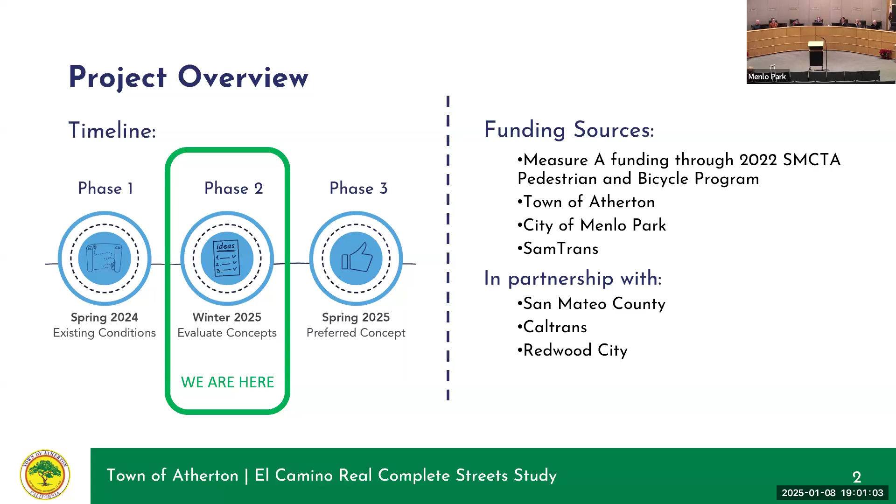Focusing on the work in this current phase, we've taken what we've learned from the existing conditions analysis and developed preliminary design options. These options are being evaluated based on criteria tied to our complete streets goals and objectives, and framed based on the trade-offs required to implement each option. During this phase, we'll go through another round of robust engagement with partners, key stakeholders, and the community to get feedback on these concepts. This will include in-person and virtual events, an online survey, and community meetings that we hope you can help promote attendance for. This feedback will inform the next phase of identifying a preferred concept, which will ultimately need to be coordinated with Caltrans for more detailed design and engineering work.

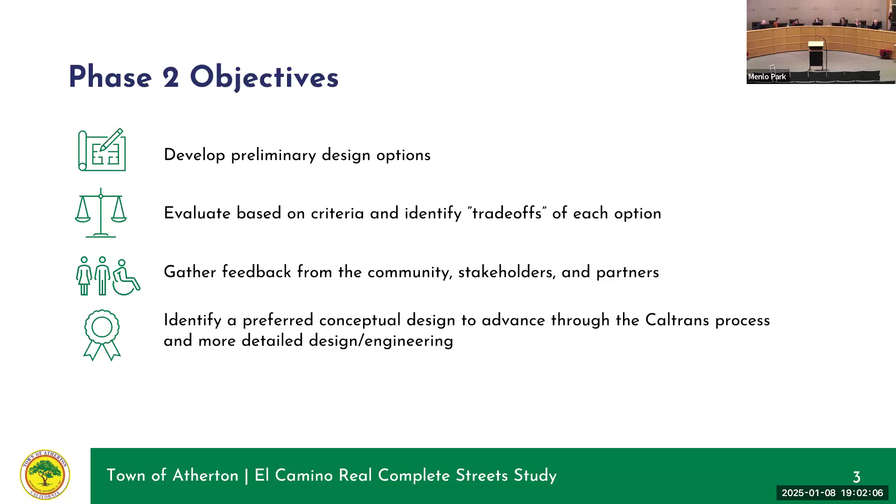So with that, I'll hand it off to Doug.

Thanks, Carol. All right. You know, like any local transportation initiative that is undertaken, this project didn't come out of thin air.

It was in fact rooted in a number of local policies and plans in the town of Atherton. But because we really do see this as a multi-jurisdictional corridor with frontage in Menlo Park, we also looked to other sources, including sources within Menlo Park.

The primary policy foundation for this project came from our 2014 citywide Bike and Pedestrian Master Plan. That plan looked at El Camino Real as the backbone of an active transportation network throughout the town, and called for conversion of the outer southbound lane on El Camino to a Class 1 facility. It also looked at other facilities on side streets, including Class 2 lanes on Selby Lane. That master plan called for a traffic study to look at the feasibility of converting one or both travel lanes in each direction for these dedicated pedestrian and bike facilities, which we'll go over a bit today.

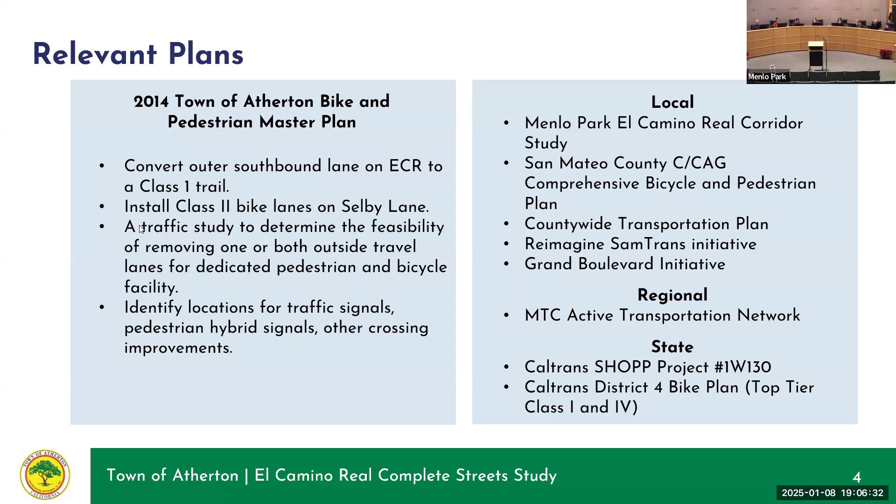Let's go to the next slide. So like any good plan, we took stock in the year 2024 to catalog the existing conditions along the corridor.

We did a lot of work to identify who uses the corridor, and what we found is that, as a multimodal corridor, there's a whole population of different demographics being served. We have a number of schools, particularly in Atherton, along El Camino, and a number of school-aged kids that use the corridor.

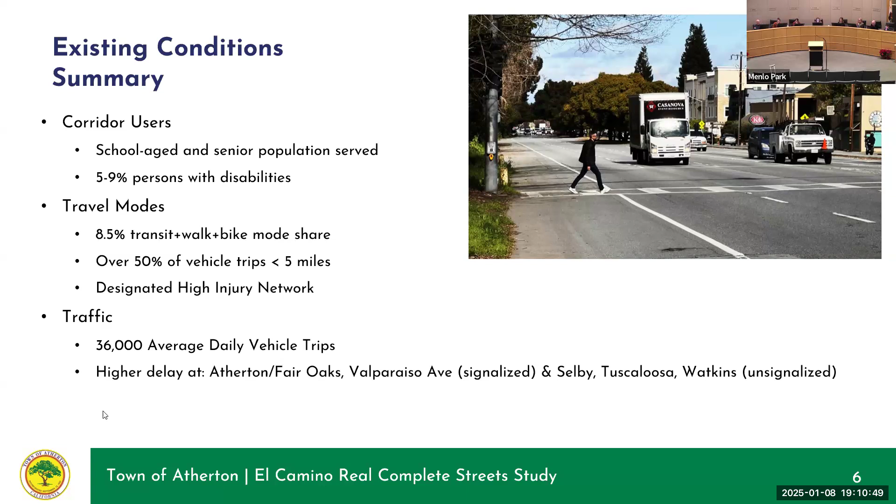In terms of traffic numbers, pretty much what you'd expect from your neighbors to the north. We had 36,000 ADT throughout most of the corridor. We had higher delay at the signalized intersections in Atherton, primarily at the Atherton-Fair Oaks intersection. We know about Valparaiso as well. Selby Lane, which does not have any stop controls on the main line of El Camino, has some delay. Tuscaloosa and Watkins are other unsignalized intersections where we had some amounts of delay, particularly at cross streets.

In terms of what the community had to tell us, we looked at all the data sources that produced some of those findings we showed earlier, but we also went to the public, both Atherton residents as well as many Menlo Park, Palo Alto, and Redwood City residents, to ask them what their top priorities are for this corridor so we can go from good to great.

Not surprisingly, safety for both pedestrians and cyclists were priorities number 1 and 2 by a long shot from the over 300 surveys we received. Safety for drivers was also a concern. Many of us who drive down there see people trying to navigate the shoulders by bike or foot and want to see safety improved for those folks as well.

Then you see a number of other priorities that are on a different tier than the safety-related items we mentioned earlier.

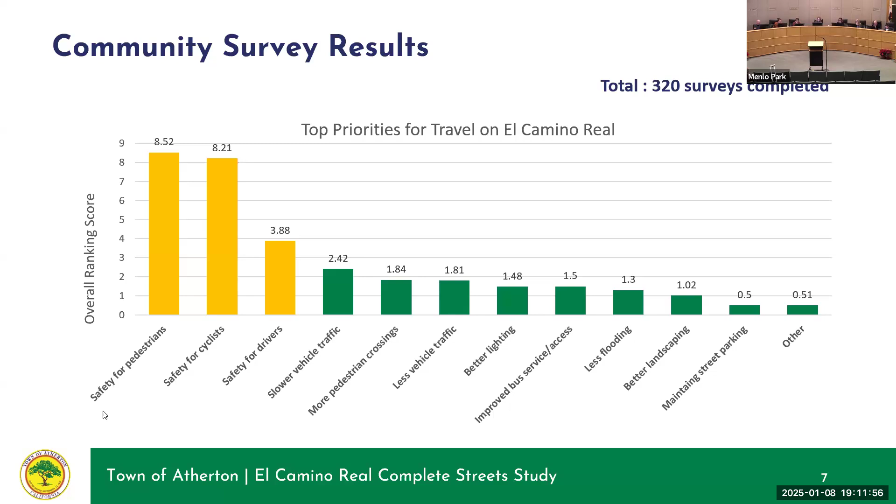All right, so that's a real quick snapshot about the existing conditions that set the stage for some of the design concepts we've been looking at. I'm going to turn it over to Andrew Lee from Parametrix, who will walk you through some of our concepts and get some initial feedback from you.

Great, thank you, Doug, and good evening, commissioners. We'll just go to the next slide.

So just to recap a little bit of what Doug mentioned, the initial concepts that the project team developed were based on community input and also some of the parameters of the study. We considered many alternatives, not all of which are being presented tonight. Some of the initial alternatives were screened out, including elements like two-way bikeways on one side of the street or busways. But the 3 we will be presenting tonight are the ones that scored most highly in our initial screening in relation to those concepts and the community input we received.

So tonight's objective is to receive your feedback on the design alternatives and ultimately to advance a preferred design into a later stage for detailed engineering. Next slide, please.

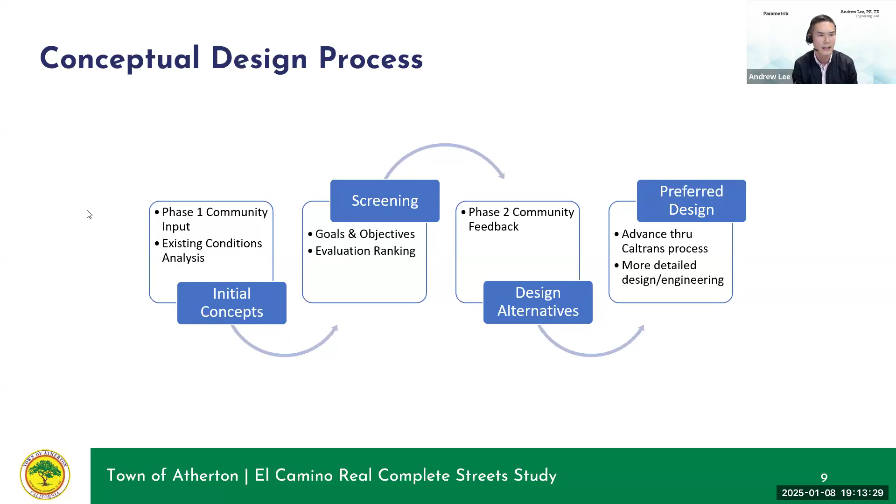We tried to synthesize the competing needs of the corridor into 6 broad categories, which were alluded to in the community feedback process. They relate to safety for users bicycling, walking, driving, and riding transit. And then outside of the immediate safety issues, some quality of life matters as they relate to traffic diversion, especially when looking at alternatives that may reduce the number of vehicle drive lanes.

Some of the concepts would also require reallocating existing street parking along the corridor, primarily in the northbound direction. And then lastly, there's the opportunity to install stormwater detention and collection features, as right now it's mostly unpaved shoulder and not equipped for stormwater runoff. Next slide, please.

So in the section specifically adjacent to Menlo Park, largely from Glenwood and Valparaiso to approximately Alejandro, we're dealing with an approximate 100-foot right-of-way. It does get a little bit wider to the north as we get into the North Fair Oaks area, widening out to about 130 feet. But specific to the Menlo Park area, this is where El Camino Real has 3 southbound lanes and then 2 northbound lanes with on-street parking.

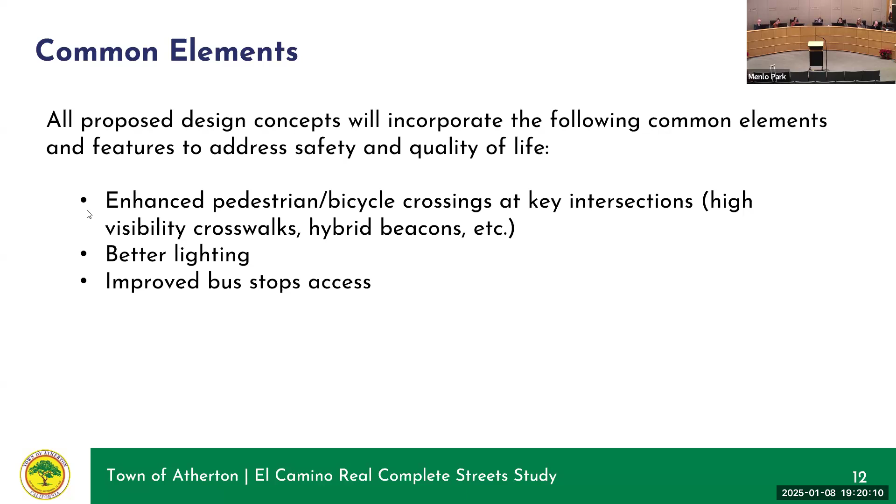So the three concepts we're presenting tonight are essentially a spectrum, one from probably the least amount of change to a greater degree of change, and then a hybrid of the two.

For design concept one, the main feature is that it would maintain 3 lanes in each direction of El Camino Real where there exist 3 lanes. The caveat is that in the Menlo Park adjacent area, where there exist only 2 northbound lanes and parking, that condition would remain. The intent is that the sidewalks and bike lane would fit within the existing unpaved area and painted shoulder, so the bike lanes would be a simple stripe with no horizontal or vertical buffers.

In some areas, the sidewalks, particularly in the southbound direction, would be rather narrow and possibly constrained by existing raised features like utility poles and large trees. So the enhancement to both bicycle and pedestrian comfort and safety would be more on the modest to marginal side of the spectrum.

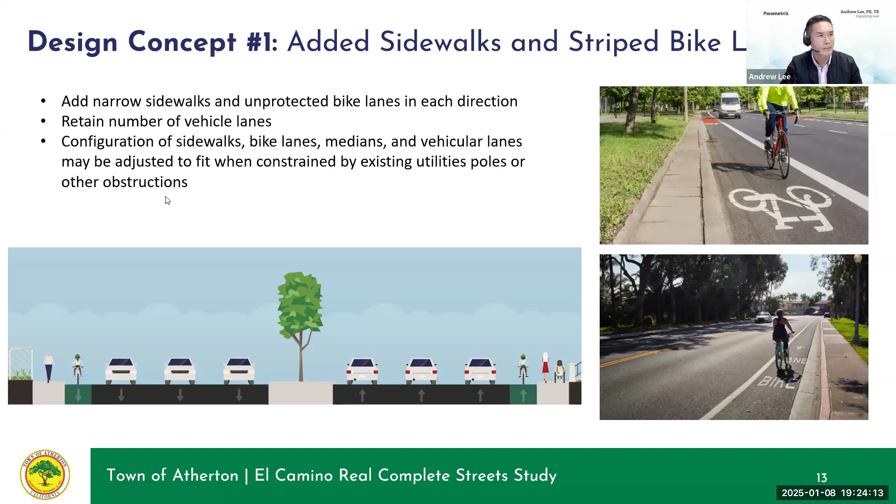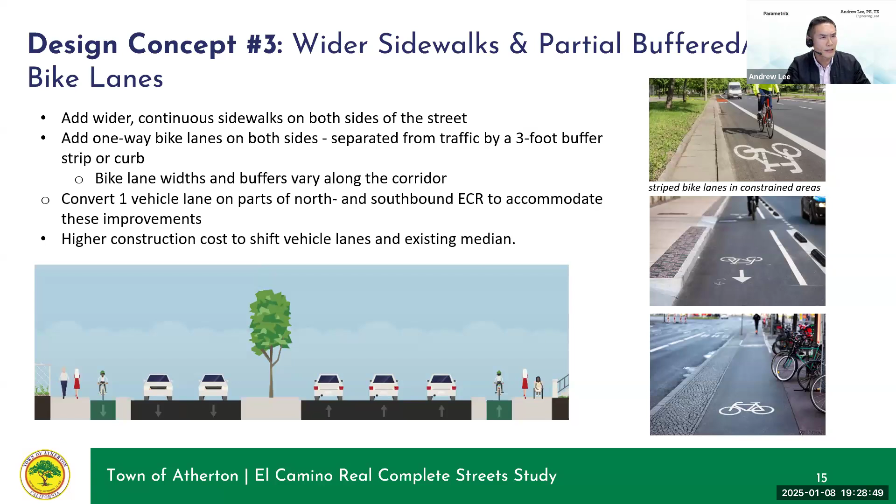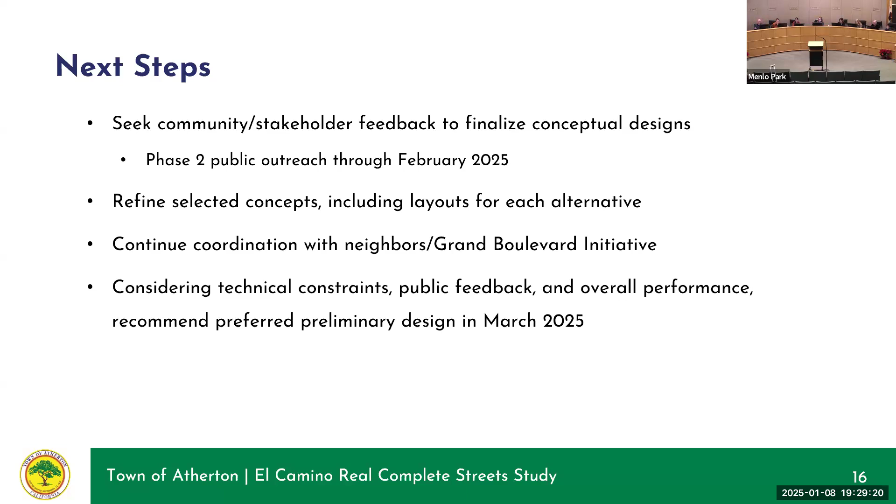Great, thank you, Andrew. So just to kind of wrap up the presentation deck, I'll summarize the next steps for the team. We'll be proceeding with another round of community engagement this month through February, and use the feedback that we get to further refine the concepts that we shared with you today. Concurrently, we'll be working alongside the team that's leading the Grand Boulevard Initiative to streamline both efforts so that we're not duplicating any work. And then come March, we hope to have a locally preferred alternative identified that we can then engage with Caltrans on for the more detailed design work and engineering work.

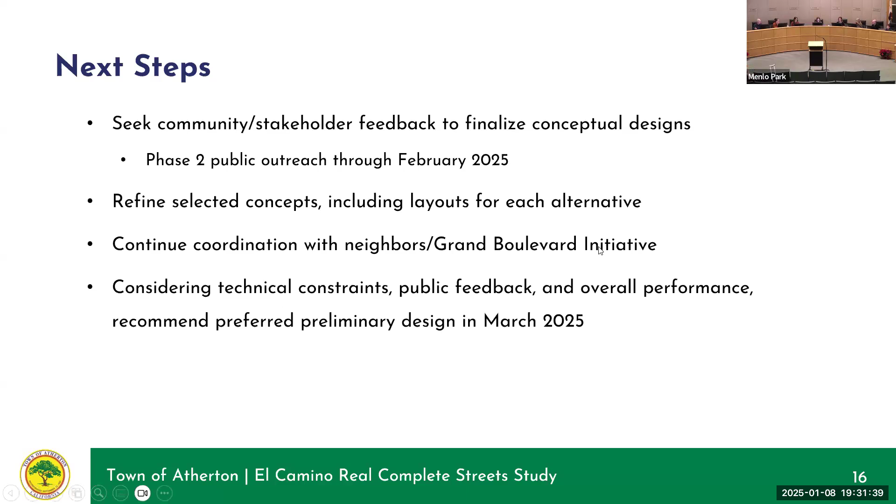I have a couple questions. I wasn't clear on exactly where the starting or ending points are. I know this is a long corridor, but what are we reviewing here? Just the part that's adjacent between Atherton and Menlo Park? The project scope is from Selby Lane at the north end to our city limits down at Valparaiso and Glenwood. We recognize within that 1.5 mile corridor that the stretch between Encinal and Glenwood is Menlo Park frontage, so what happens there won't necessarily happen north or south of it. We wanted to provide an overall perspective on what's happening north of Encinal, but our focus with you is on the Menlo Park frontage.

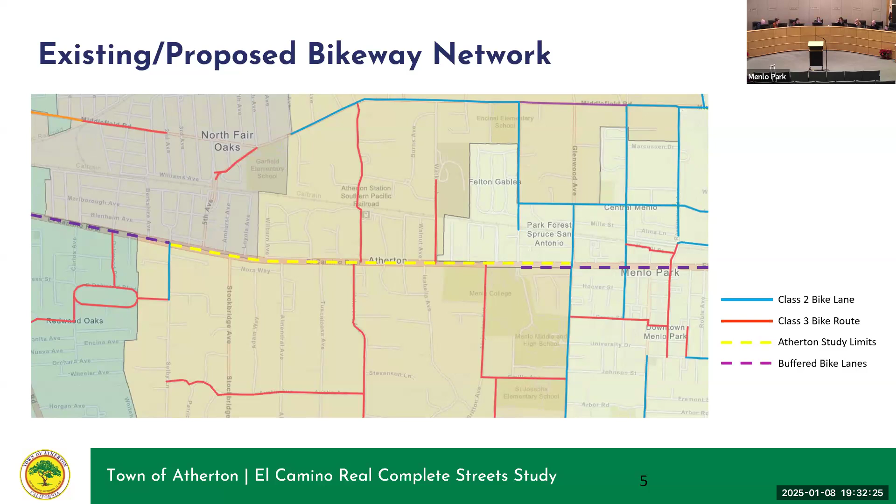My second question: in option number 2, the design option, you have a center refuge in the image, but you do not mention it in the bullet points. Having lived on Alejandra, I know about the fatalities crossing El Camino, and I'd like to know if that's part of the design or just in the image. Absolutely, pedestrian refuges are intended to be part of the design of any new crossings on El Camino, as well as upgrades to existing crossings. Would they only exist at the crossing points, or the whole corridor? They would be at the marked crossings that are either existing or planned.

I have one question, maybe two. How many parking spaces are there on El Camino? Is it a lot? We did a sort of desktop assessment of parking. The rough estimate is about 30 or so spots, mainly in the northern end and the southern end.

I think the last time you presented, you said it was along the businesses there, correct? Correct, only in the northbound direction. And just so I fully understand, when you were talking about delays at the side streets, that's delays from traffic getting onto El Camino, right? Yeah, oftentimes people trying to make a left onto El Camino. Got it, thanks.

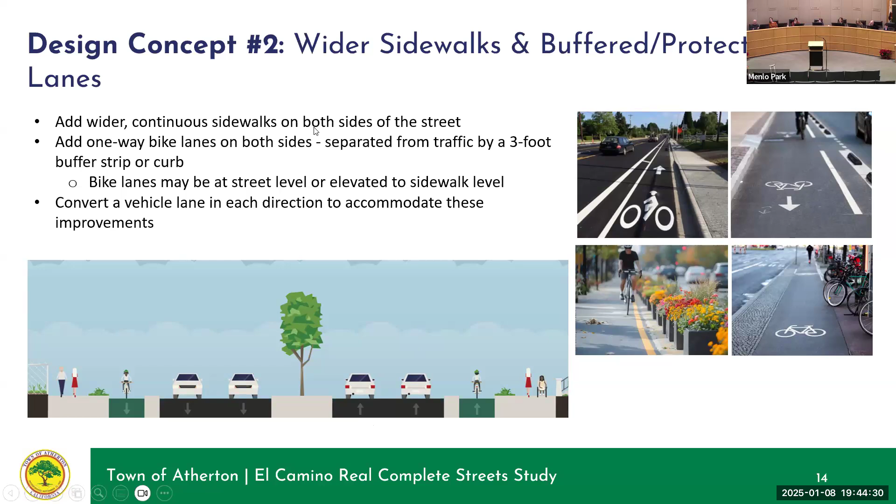Yeah, it's important to remember that report recognized the potential of a 2-way cycle track, but it also said to do your due diligence and take a look at the mobility and traffic impacts of different design options. So when we looked at the universe of potential design solutions, we looked at a cycle track just on one side, a cycle track paired with a one-way on the other side, and determined that for a number of reasons, including right-of-way constraints and circulation patterns, having a two-way cycle track on one side, whether paired with something else on the other side, wasn't something we thought would screen to the next level of analysis, largely because of circulation issues.

I can give a little bit more detail. We took a pretty deep look at the two-way separated bikeway. A few factors: one is because of there being two-way bicycle traffic on one side of the street, that's an atypical section. For one thing, it's not compatible with the plans for the bikeways to the north and to the south, which are for one-way separated bikeways on each side of the street.

Two is looking at potential vehicular delay, particularly at traffic signals. The best practice for a two-way separated bikeway on one side of the street is that there be a dedicated signal phase so that no right turns are allowed during the bicycle crossing phase. So that's an issue there.

Also with vehicle movements, there are a lot of U-turns on this corridor, and given the right-of-way constraints, a lot of the U-turning movements end up tracking pretty wide and needing to go into what would traditionally be the bike lane to complete their movement. But with a two-way facility on one side of the street, you can't allow a vehicle making a U-turn to track into any part of that two-way bikeway. That necessitated a much larger lateral shift in the vehicle lanes, which had all kinds of effects on how the median would need to be redesigned. So it was the unfamiliarity of a two-way facility on one side, the incompatibility with plans to the north and south, and the degree of change needed to accommodate that facility safely and comfortably - it was a really big lift.

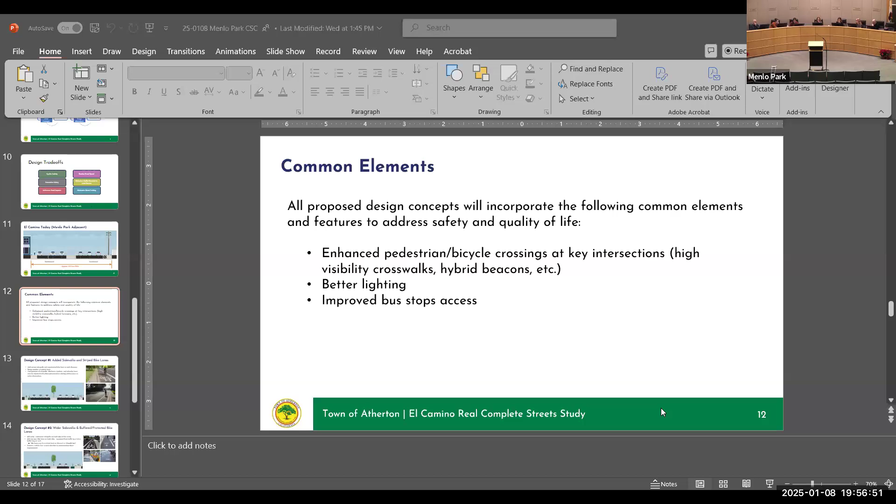Can I ask one small clarifying question before we get to everything else? The parking spaces, are any of them affected by the daylighting law? Is that factored in, or would any of those spaces disappear because of that new daylighting requirement? I think the short answer is no, but I'll let Andrew chime in to explain that better.

All right, thanks. Yeah, the parking near intersections is pretty limited along the corridor. In the south area, within the Menlo Park portion, approaching Encinal, there's a northbound right turn lane, so that takes out all sort of potential parking. Then south of Encinal and north of Glenwood, there's mostly commercial driveways where there's parking, but they're not considered intersections, so they're not subject to that daylighting law.

In the North Fair Oaks area, where there's existing parking, similarly there's a lot of right turn pockets designed to facilitate movements onto the side streets, and that precludes what could have been parking. So the parking removal doesn't really get affected by the AB 413 daylighting law.

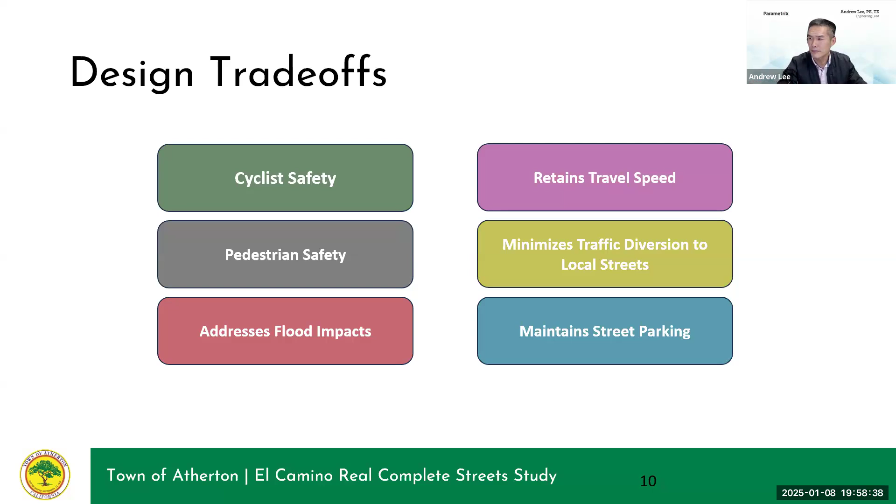Okay, thank you. So commissioners, would you like to provide your feedback to the county and the town of Atherton on the 3 design concepts?

I'm happy to get us started. I wanted to speak in favor of option 2 by far. It's not often that the better option's the cheaper one, and in this case option 3 costs more and is vastly inferior in my view. Option 1 is not even worth considering, given the vehicular speeds on El Camino and the way that paint does not provide any confidence or safety for a cyclist. So option 2 to me deals with the U-turn concerns and the speeding concerns on El Camino.

I think it's already supported by all of the reports cited at the beginning of the study, including Caltrans District 4's report, the Menlo Park El Camino Real study, and the Grand Boulevard study. The master plan effectively supports this, even if we don't do the two-way cycle track—it advocated for physical protections for the lanes. Like option 2, both of the public speakers also advocated for it, so to me this seems like the vastly superior option. I'd also note that Menlo Park already has 2 lanes of traffic in the downtown area near Springline, and has higher average daily traffic than Atherton does.

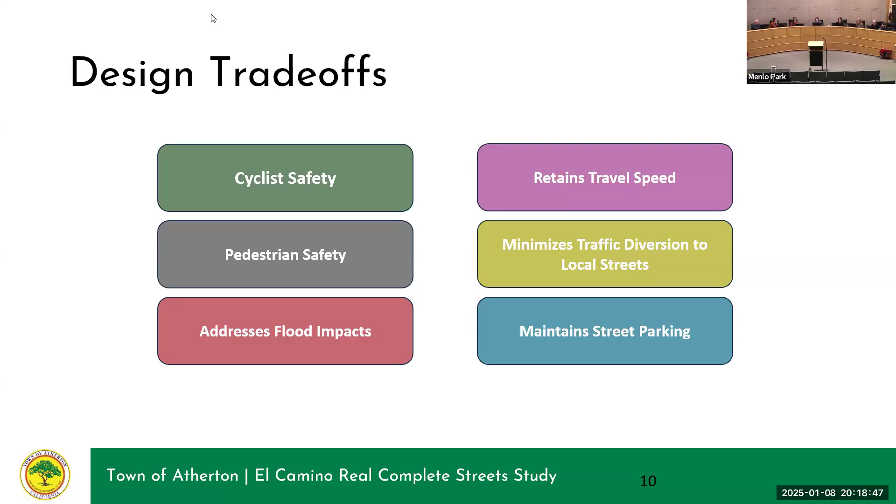Okay, we will move on to informational items, where city staff provides an update on matters of importance to the commission. Informational items are not action items; however, a commissioner, city staff member, or a member of the public may request to make a comment or ask a question on any of the informational items.

The first informational item tonight is F1, update on major project status. Katrine, do you have any updates? I do - the 2025 street resurfacing project for all of Menlo Park. It's part of the 5-year street maintenance program, and it's been published on the city website, which includes a map of the proposed street resurfacing locations. Construction is tentatively set for May.

You can view the map online for exact locations and extents, but I can quickly list the streets to stir interest: Deanna Drive, Monte Rosa Drive, Stanford Avenue - and I've only been here a year and a half, so forgive me if I pronounce them wrong - Millie Avenue, I don't know where that is, Roble Avenue, Waverly Street, East Creek Road, Middlefield Road, Woodland Avenue, Grayson Court, Sevier Avenue, Iris Lane, and Chrysler Drive.

This might be unrelated, but I know the installation of traffic calming measures on Middle Avenue includes resurfacing. They wanted to combine and do it at the same time in the summer of 2025, so whenever you have an update on the timing of that, we'd love to hear it as well. Yes, that is a separate resurfacing - it might be bundled with another project. Look into that and let us know. Right now the goal is to have it happen before school begins; that's the target because we don't want construction going on when school starts. Thank you, Katrina.